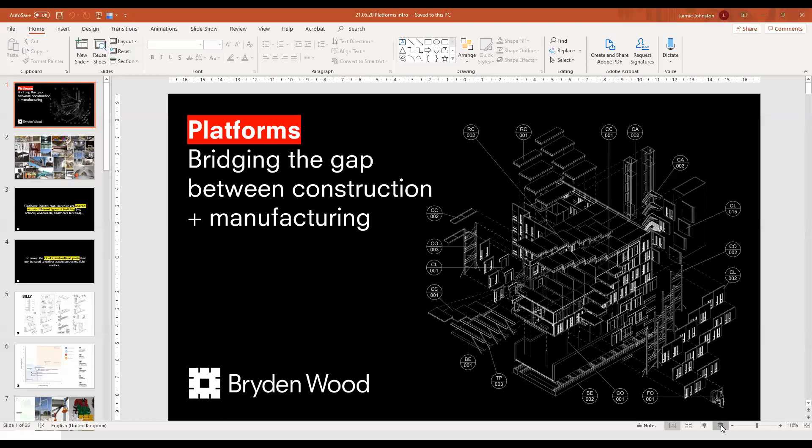Okay, let's just share my screen. Can you hear me all right? Another slide's coming up. I can, Jamie, that's fine. Okay, I'm assuming that's right. I will apologise in advance because my internet's been dropping out all day, so hopefully it will hold up for long enough.

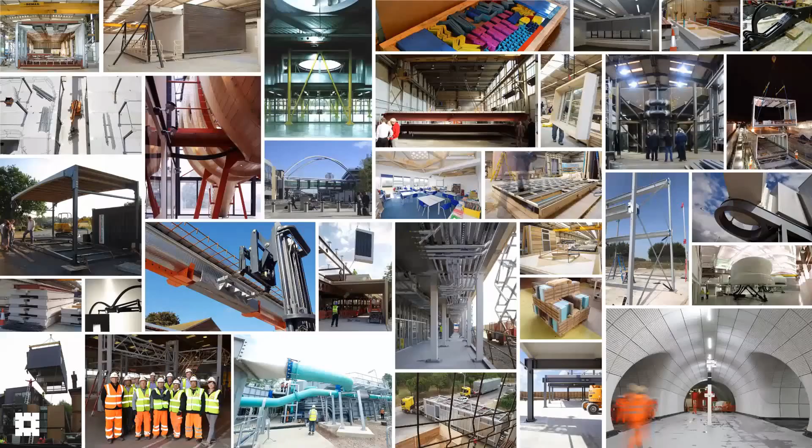So I'm going to give a sort of industry overview and highlight some of the big trends that we're seeing emerging in this platforms space. For those who haven't come across Bryden Wood previously, we've been going for 25 years now. We're an integrated consultancy, and we were set up specifically to look at what a manufacturing-led construction sector would look like. So how do we get all of the benefits of safety, productivity, speed, quality, et cetera, that have happened in other sectors into construction, which, as everyone knows, famously hasn't changed fundamentally for a long time.

So for the last couple of years, we've started trying to generalize that approach. The term platforms came out of a conversation with the Manufacturing Technology Centre, with Infrastructure Projects Authority and central government. It was a term we deliberately appropriated from manufacturing. Automotive uses this term quite a lot. It's the kind of common kit of parts. So we started saying, well, what are all the things we've learnt from a couple of decades of doing this? What are the features that are common across multiple types of building?

So if you ignored the sector boundaries that people put in place, what are the common threads that you could start to pull together that would then reveal a common kit of parts that you could use to deliver lots of different assets across lots of different sectors, which would get you into the repeatability that manufacturing likes, the sorts of numbers that manufacturing likes, and therefore you can unlock all those benefits.

Actually, everyone's already familiar with this concept. IKEA obviously weren't the first people to do flat pack, but they've certainly scaled up that market. Almost everyone has probably put together some IKEA furniture, and you've probably noticed that there are some common connections which are the same whether it's a bed or a wardrobe or a chest of drawers or a bookshelf. So there's a whole lot of intelligence that goes into those individual connections and ways of putting things together, which unlocks the ability to then make lots of different bits of furniture.

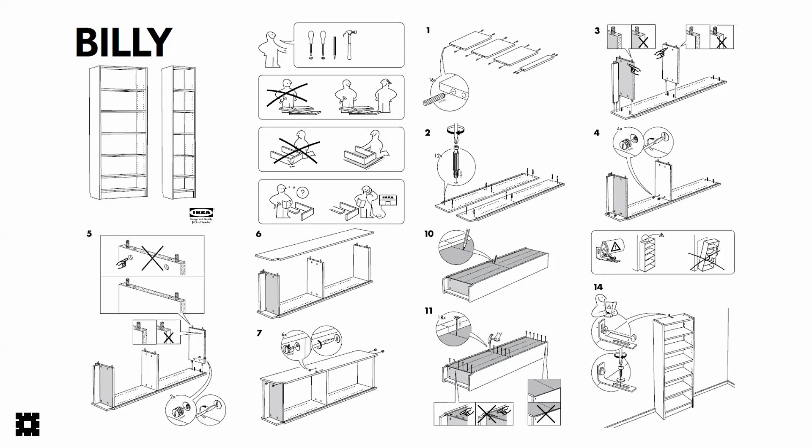You've also noticed that it's logistically very efficient, so you can get an entire bedroom's worth of furniture into the back of your car, and it's democratized or diversified the pool of furniture manufacturers because everyone's put together one of these things. So by standardizing components, they've unlocked a whole load of benefits, and we're trying to do the same thing for construction.

So we started this conversation with the IPA a few years ago, saying, well, if you plotted everything that government buys on this graph, everything you buy lives there somewhere in terms of spans and floor-to-floor heights. There are certain truths about certain building types. Floor-to-floor heights are a person height plus some headroom plus a zone for structure, finishes, pipe work and duct work. So actually that floor-to-floor height is nothing to do with sector, and it's all to do with people. And at that floor-to-floor height, there's a natural depth of about 8 meters.

You can get natural daylight into a building. So that's why lots of buildings have an 8 meter span corridor, 8 meter span. So apartment buildings, schools, hospitals.

So we started saying if you plotted buildings like that, you could imagine an IKEA kit of parts that would do you small scale or cellular accommodation, repeatable accommodation buildings for MOJ, for Ministry of Justice, for single living accommodation for the army, for student accommodation, a kind of mid-span general purpose kit of parts, which we call Platform 2, and a big empty shed kit of parts, and you'd be done. So with a relatively small number of components, you could build big chunks of the government estate.

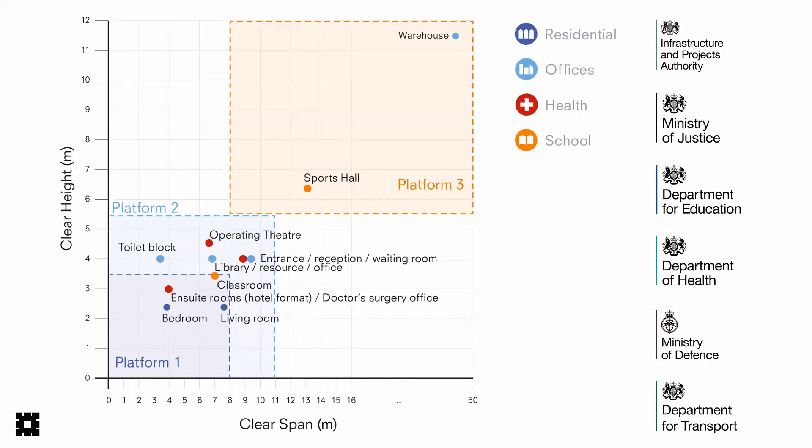So we're using concrete for the slabs because it's good for fire and acoustics, and at a price point, there's not much that can touch it. We'll talk about the sustainability bits in a bit. We use steel for the columns because it's small in section size, it disappears into the walls. But what we've tried to do is compress all of the intelligence into the connectors, just like IKEA.

So if you buy a fabricated steel frame, it's about £2,500 a tonne. The raw cost of the steel is about £800 a tonne. And all of the extra cost is the transportation, the handling, the fabrication, the assembly on site. It's all of the kind of other bits that are not to do with material. What we do is literally buy raw steel, have one hole cut or laser cut or punched into it.

Turns up to site like your IKEA kit, spanning elements called ComFlor turn up to site, and then those brackets turn up to site. So we're buying commodity materials from big steel manufacturers, concrete from aggregate industry. So our supply chain is sort of big commodity people, and then the brackets are made by very small, very local SMEs who couldn't do a steel frame but can do laser cutting. So it makes our supply chain quite broad and diverse.

And then on site, it's IKEA style. It's deliberately color coded. So the color tells you what type of connection it is. We only ever need those brackets. So regardless of the scale of project, whether it's Heathrow or a primary school, we just need those brackets, which means we can make lots and lots of those brackets, which starts to get us into that sort of economies of scale place.

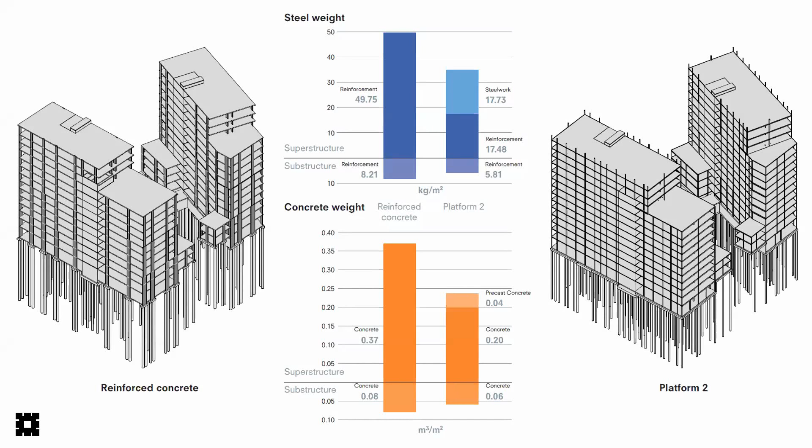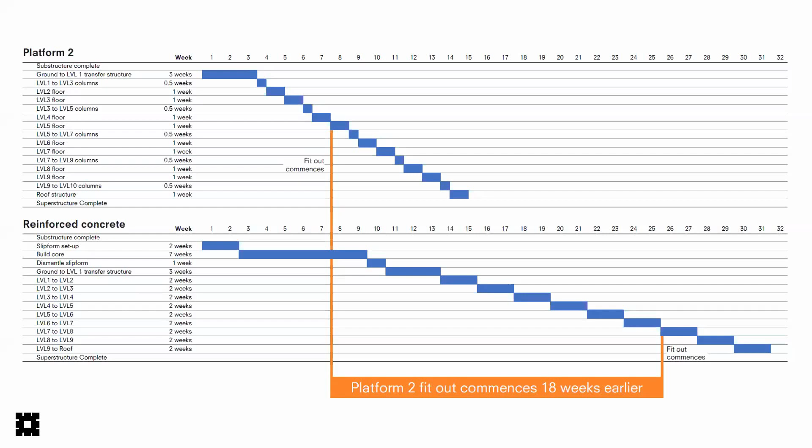This is market returns. We've had tender returns from steel specialists and concrete specialists. They're both saying we can assemble this, and they're both saying it's about twice as quick. And then you can imagine once you've got the superstructure, very, very quick and accurate, the facade clips into place, the MEP clips into place. So the superstructure goes up quickly, the following trades start quickly, and the overall program starts to massively compress.

The idea being that if you could use the building of the prison estate to upskill serving inmates, forget the cost reduction you get in the construction, you could actually create new jobs, new opportunities. You would potentially rehabilitate prisoners who are then less likely to reoffend, so societal impact is large. And the point was that if one of construction's big problems is skills gap, if suddenly your pool of resource included non-construction people, so ex-services, ex-prisoners, unemployed, skills gap disappears, you create new jobs, new manufacturing, and then that has a potentially massive benefit, which is one of the reasons government's very interested in this approach.

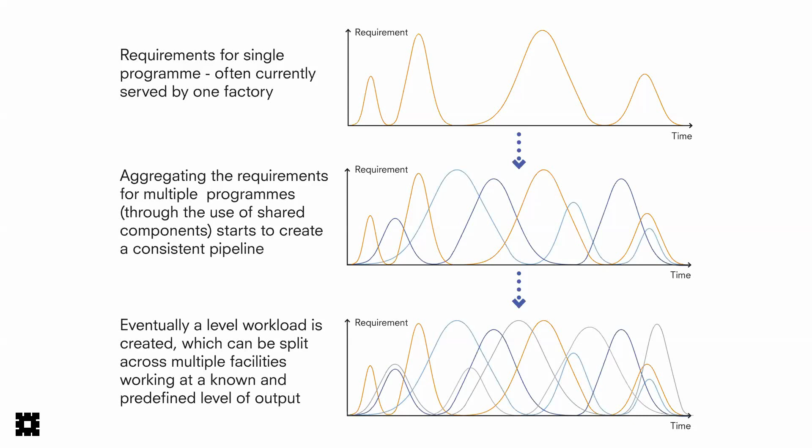The other thing that government recognised was, on the top there, the sort of procurement. Any major department, they buy loads of schools, or prisons, or whatever it is. I think people have recognised that if you were buying the same components across multiple programs of work, then you'd start to build up a steady state base load of pipeline of need for these components, which would get you into the space where manufacturers could invest, meet you halfway, and suddenly again you start to get that certainty of pipeline, which is one of the big problems that people foresee in other forms of modern methods of construction. So we start to get to a place where we're just buying these things consistently.

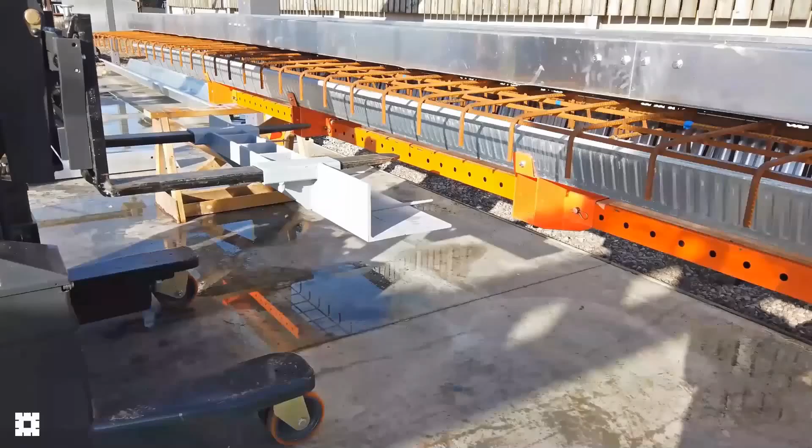The other thing, of course, it does is once you get into those scales, then you can start to deploy robotics. It's not worth doing unless you have a very, very fixed product and a potentially quite large pipeline. So we're already working with robotics manufacturers on what is appropriate to make the individual components. So we don't think... and proper manufacturing, and I think we're going to see more and more of that sort of stuff in the future.

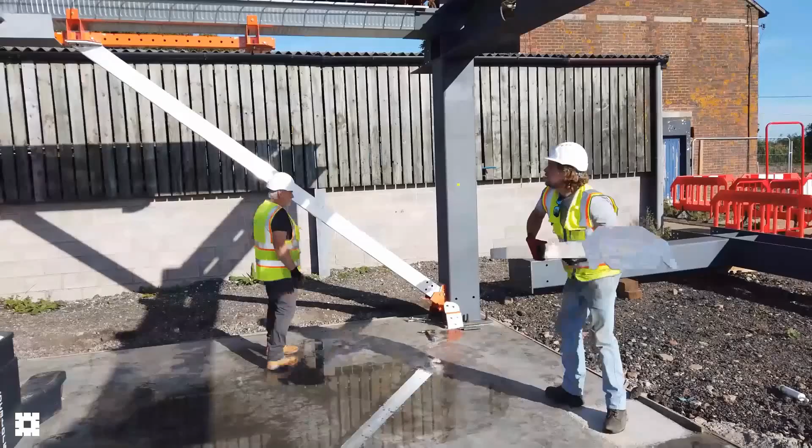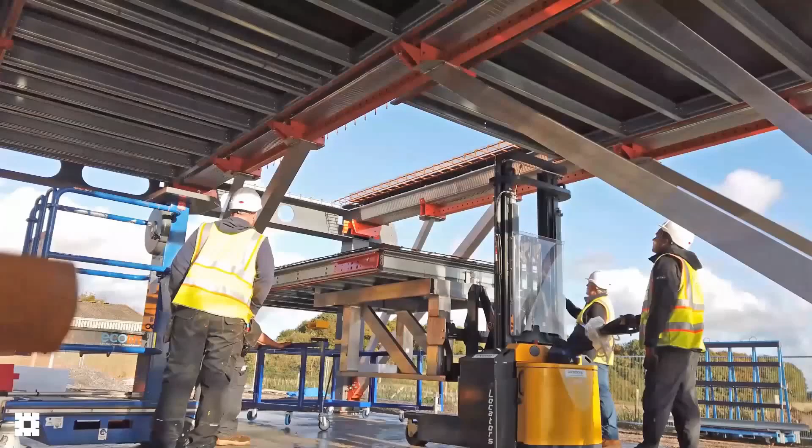The other thing we've been investigating, this is our prototyping centre. This is a larger span platform, but the principles are exactly the same. This is for Landsec. This is about 9 by 9 metre grids. We've been looking at what level of automation is appropriate on site. So as I say, it's not big robotics. All of the kit that you're seeing here is stuff that they use in distribution sheds all the time. What you're seeing here is the shuttering getting lifted into position. So the principle was to build the entire slab from the slab below.

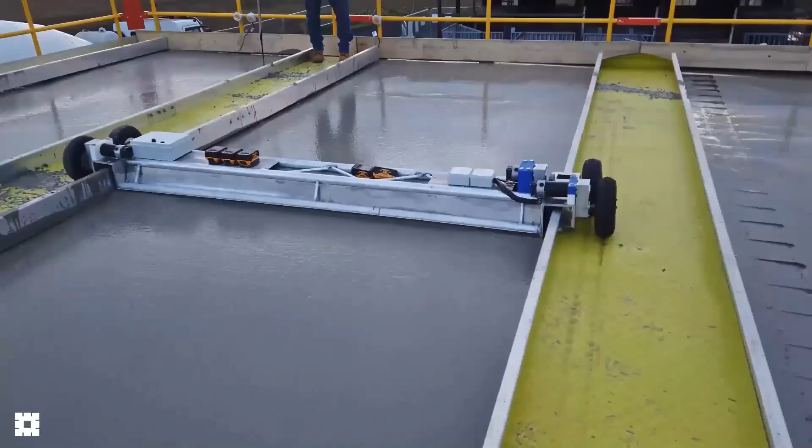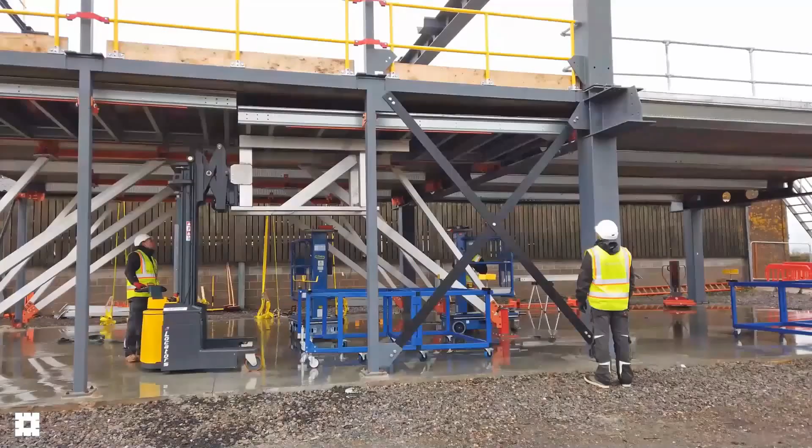So we're pumping the concrete. It's self-compacting concrete. We have a little robot that levels it on the top, which is fairly straightforward stuff. But the idea is that once that slab's gone off, you then lift the kit onto the next slab and then you build it up. So what we're demonstrating is that with 4, maybe 5 people, you could build yourself a 10-story office with a tiny number of people, a little bit of automation. You'll see in a second, we've also got all the MEP fixing points already in place. So then the MEP kit clips into position and off you go.

So we think there's an opportunity to start to deploy automation at this sort of level. And I mean, we were doing this anyway, but you can imagine a post-COVID world where we're looking at how to have... this sort of stuff is going to start to become very, very interesting.

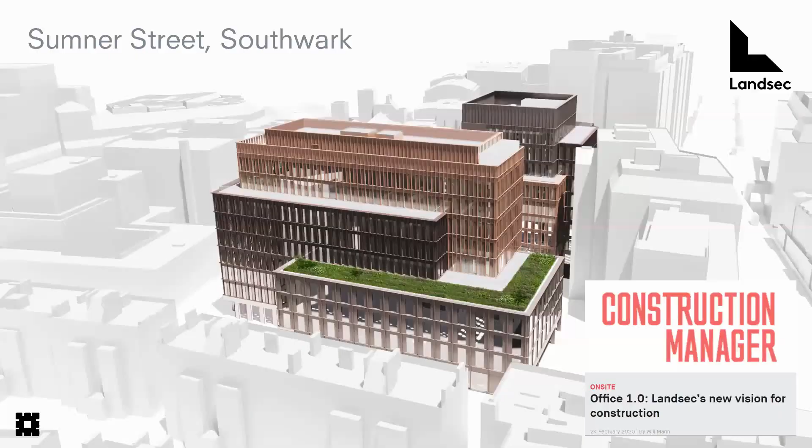It's two 9-story office buildings, so not the biggest thing that Landsec have built, but of a scale that it kind of proves a lot of points. Architecturally, it's not been compromised by the fact we're using platforms. You can see there, Will Mann has actually written a fantastic article on it, so by all means have a look at that afterwards. It's got some of the background to that.

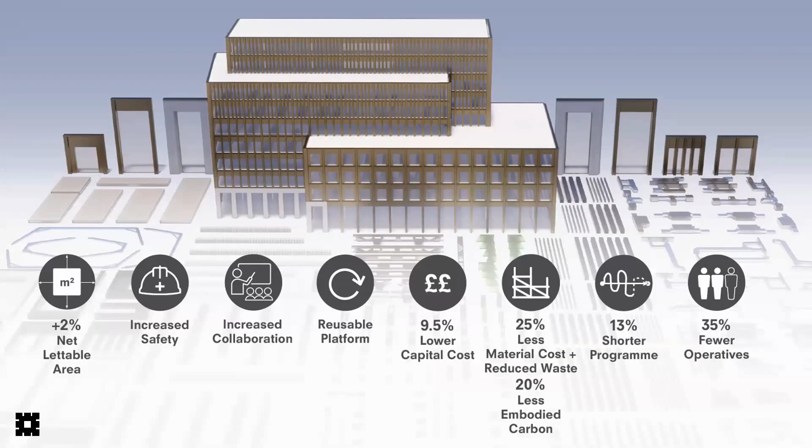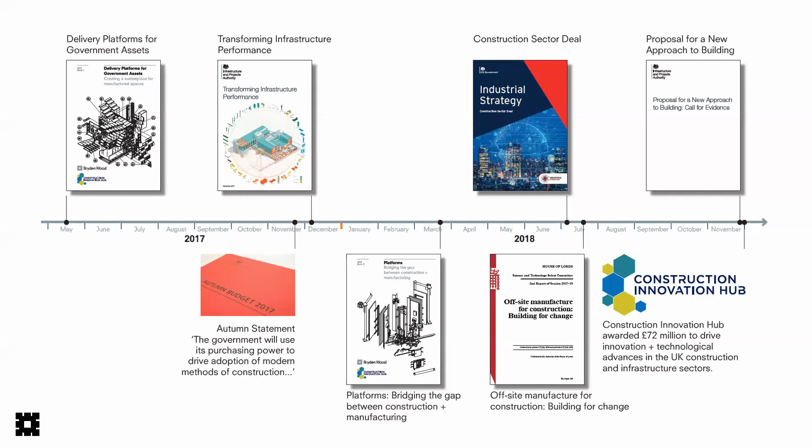As I mentioned a couple of times, government has been picking this up. So we started this conversation back in 2017. It's informed the budget statement. It's informed things like the Construction Innovation Hub. So you might have seen that IPA published this document back in 2018, saying this is what we meant by the autumn statement, that we're going to start using these components across multiple sectors, have them manufactured, use this platform approach.

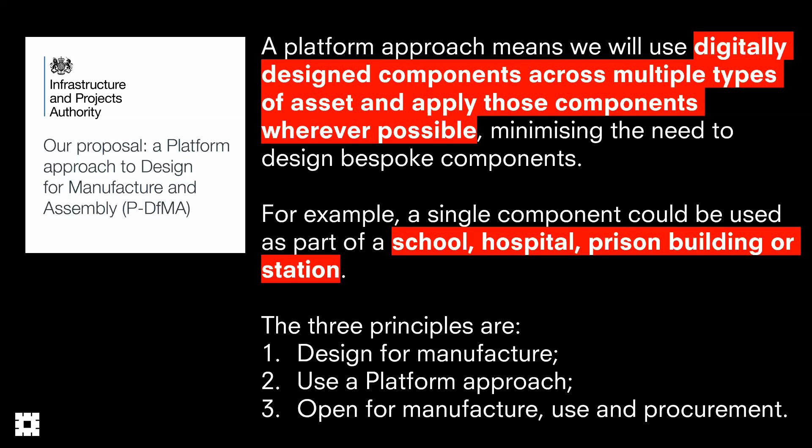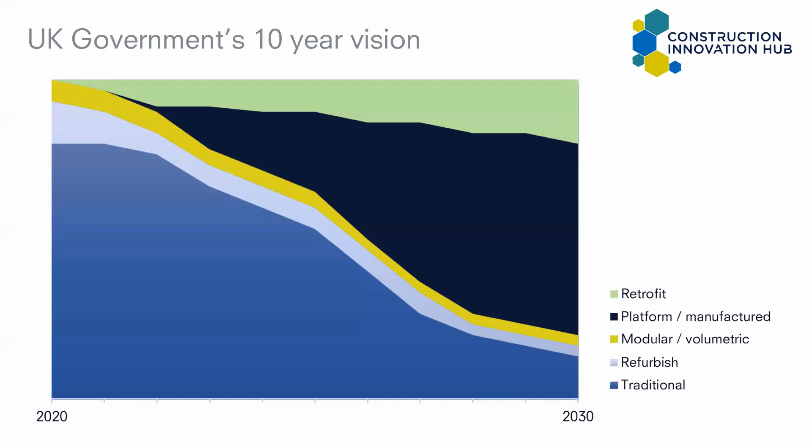This was one of Keith Waller's slides from the Construction Innovation Hub, saying this is the kind of 10-year vision: the proportion of stuff which is traditional will diminish significantly, and a lot more things will be delivered using platforms.

You might have seen this got put out on the Hub website. I'm actually the design lead for the Construction Innovation Hub as well, so we're making all of the stuff that we've learnt across the government departments and the stuff for Landsec available through the Hub. So we're now inviting industry to join this sort of movement and start to scale this stuff up. But again, you can see the messaging is quite clear. This is the longer term plan.

Last thing I'm going to talk about is the other thing it unlocks, and this is the kind of touch point with the stuff we'll talk about later. You can imagine once you've got your platform components, they're then quite rules based. So you can then start to use that rules base to automate the design process, and not just make it the same design but quicker, but actually make it a better quality design.

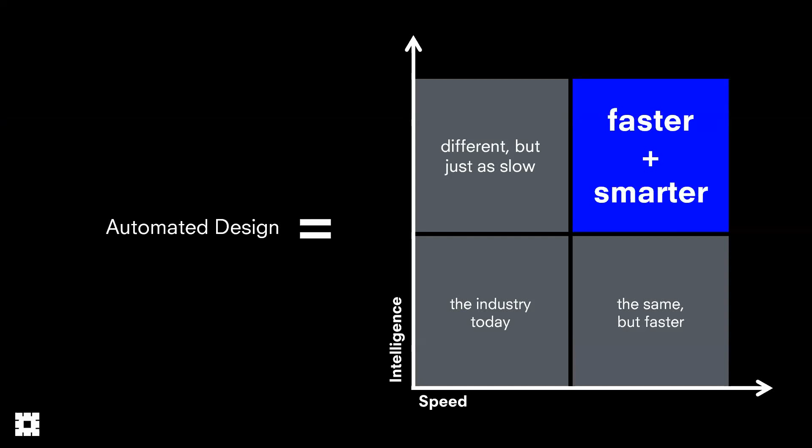So you might have seen we've been publishing open source apps over the last year or so. Not going to go through all of these, but we put one out for housing for the Mayor of London. This was to speed up the early design process for housing, but also embed within that design manufacturing logic for a number of systems.

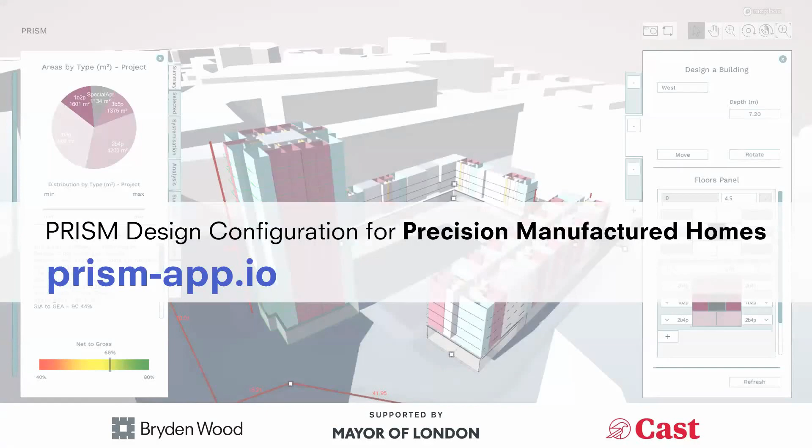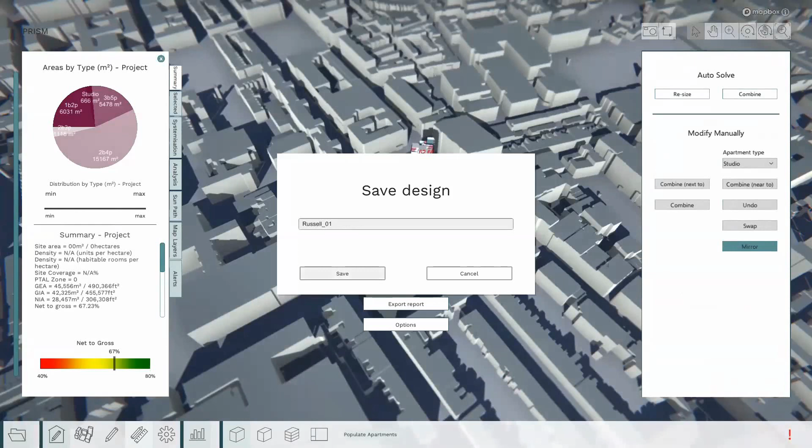And we've now got a workflow. We actually showcased this at Future Build, which seems like a long time ago now, back in February, but we've now got a workflow where we can take a design developed in Prism, which is what you're seeing on the screen here. From that, we can extract the data. We can then generate a data file of that building, which we can put into simulation software.

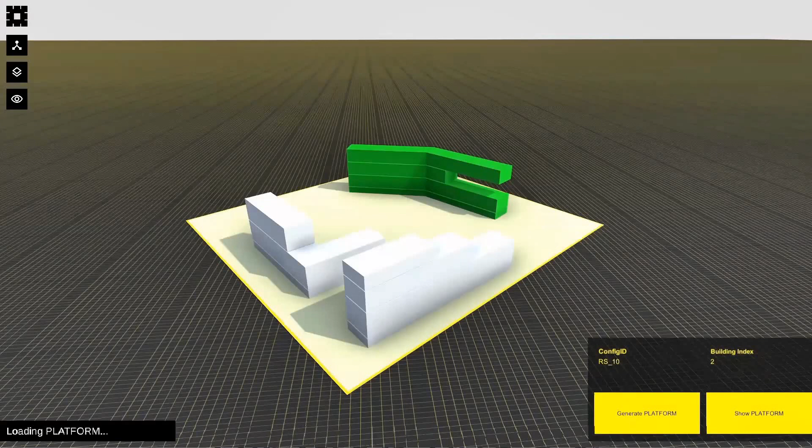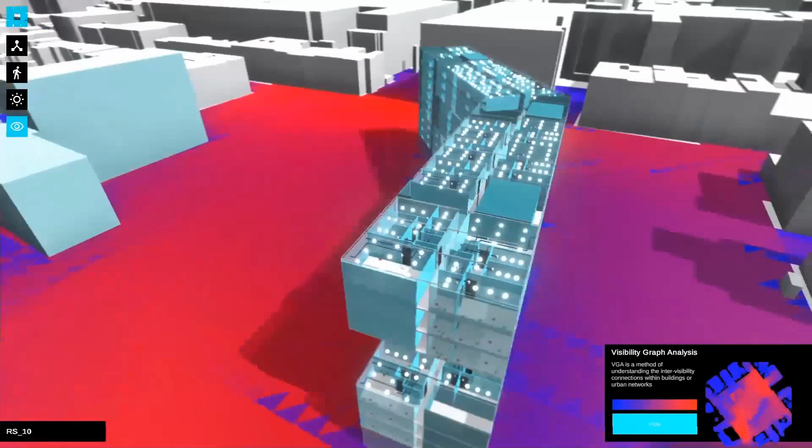So we can then run a whole load of different simulations on vertical sky component and overlooking and pedestrian movement, etc. So we can use that speed to generate a design, do lots of simulation and testing around that design, and get hopefully a better quality, better considered design. And once we've got a thing we're happy with, we then create the BIM model. We have a workflow that goes and gets the relevant platform components, generates you a LOD 400, bill of materials quality, completely coordinated BIM model, and the whole thing takes 20 minutes.

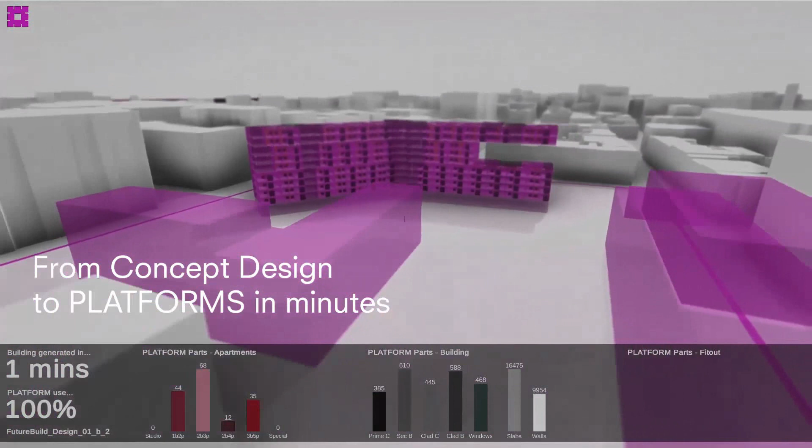So we would never do it in 20 minutes. We'd actually use that speed to test more and more ideas. But you can see once you get into this kind of approach, it starts to unlock a load of benefits, not only in the physical world, but also in the digital world. And that's the kind of thing we're really interested in, those sort of touch points.

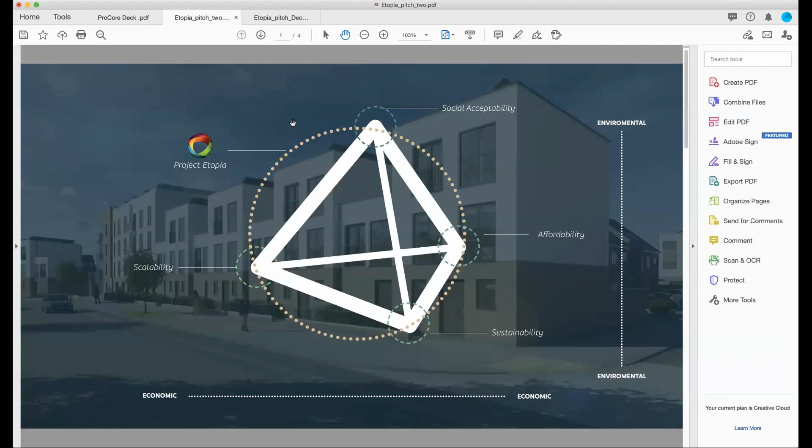So as I've mentioned, scalability, affordability, acceptability and sustainability are at the core of the business. And how does that look? Well, we have a hyperstructural panelization technology. We then combine that with solar slate, lithium and cadmium telluride energy technologies for energy generation, energy storage, and just as importantly, we have now partnered exclusively with Samsung globally for a specialist new air source heat pump that allows us to use heating, cooling, ventilation, and hot water.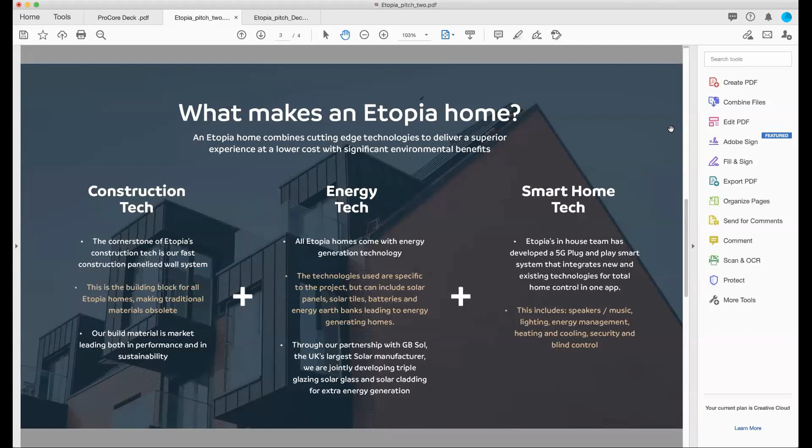So all of these core technologies can now be monitored, quantified, maintained, and discovered along a digital program. And then finally, we have our own IoT patented smart home technology. What this does is it allows sensors and all the electronics in the home to be compiled. So as you go through this process of building a super shell with energy positive outcomes and integrated smart technologies, every single process in this supply chain can be tracked. And through that, we deliver homes, apartments, and schools.

So now coming on to what it actually is that we utilize Procore for and how this fits in a digital platform. Bear with me 1 second. Yeah. So effectively, what we're looking at as an Etopia development, we've got all these typologies and we have all the different building variants, you can build any shape and size. But what's important is to understand the development process and the supply chain.

Of course, as you go through a development program, it's simple to say digital. We've developed digital tools for planning, but fundamentally there are requirements within the development, procurement and delivery supply chains that can't be negated because of a number of factors such as frameworks, global partners, and effective delivery. So as we develop the developments ourselves and we deliver these projects, we look at our core fundamental key pieces of what exists within Etopia, and the way that no matter what site you look at, from beginning of design and the platform right through to delivery and post monitoring, how these are assessed.

So effectively at the beginning, you're looking at site surveying, you're looking at Drone Deploy, you're then looking at the massing through to the design selection. Then you're incorporating some sort of VR or digital BIM twin that people can then look at.

You then have to apply your technologies to construct and build these things, whether that's your IP, secondary technology, or supply chain products. Then you have to effectively containerize or assemble and deliver these points to site that exist within different frameworks around the country and around the world.

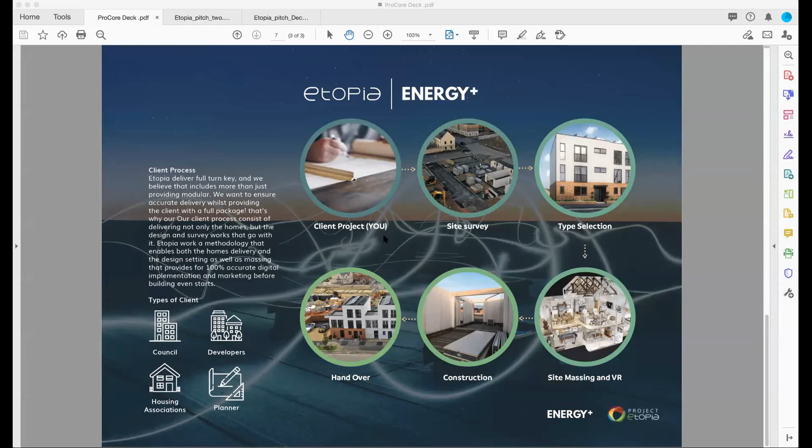All right. Yeah, so just kind of want to wrap this up from Procore's end. Thank you very much for the presentation. It's very interesting stuff. I think a couple of things that are really interesting from those presentations, talking about the platform and how Joseph and Project Etopia are grabbing other technologies and able to plug those into one centralized platform, which is Procore. So Procore's goal is to connect everyone in construction on a global platform. Very audacious goal, something that we're going to be working on for years and years to come.

So what that means is, as a technology platform, we want to connect processes, we want to connect different technologies, and we want to connect people. So Joseph did a really good job kind of explaining the technology bit. He spoke about Matterport and how they can use that solution there for part of their process, but then it plugs into Procore, the overall operating system, if you will, of those construction projects.

And let's say 5-10 years down the road, there's a new tech startup. Before this, we were all talking about how it'd be cool if we had a map of all the different construction startups that happened in the last couple of years, and they're going to continue to happen in years to come. So Procore will allow you to future-proof your business by being able to plug and play those new solutions into our open platform.